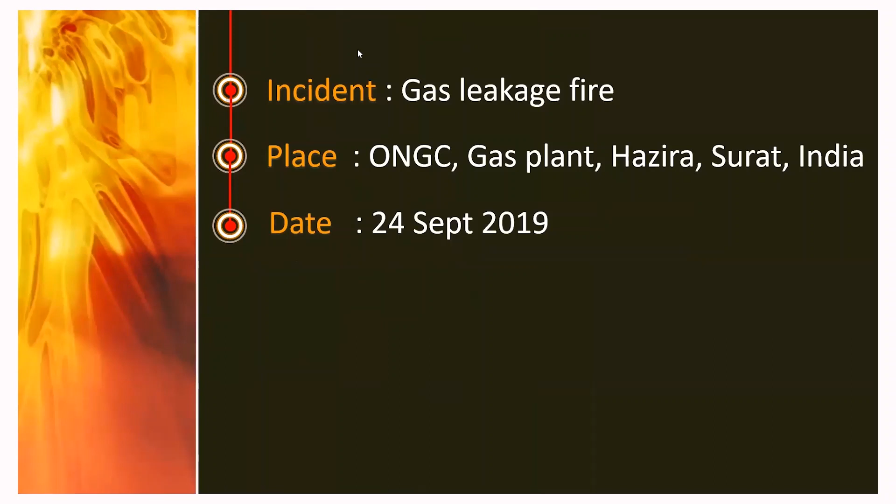It happened on 24th of September 2019 at Hazira. Basically, it was a gas leak and fire at the Hazira facility, Surat. Actually, I worked nearby that industry for 1 year, so I am very much familiar with the place. It was on 24th of September at 3 a.m. at night.

So there were many such news reports around about the incident. Let us talk about PEAR loss. Basically, whenever we are talking about loss, we always use this PEAR term: people, environment, asset, and reputation. Basically, in the incident it was not arranged like this, but we tried to map it.

People loss: what they mentioned, there is no injury or any fatality. That is good. Environment loss: they mentioned a few damages to trees, but really there was a huge release and huge dense smoke. That part was not mentioned. So here only damage to a few trees is mentioned.

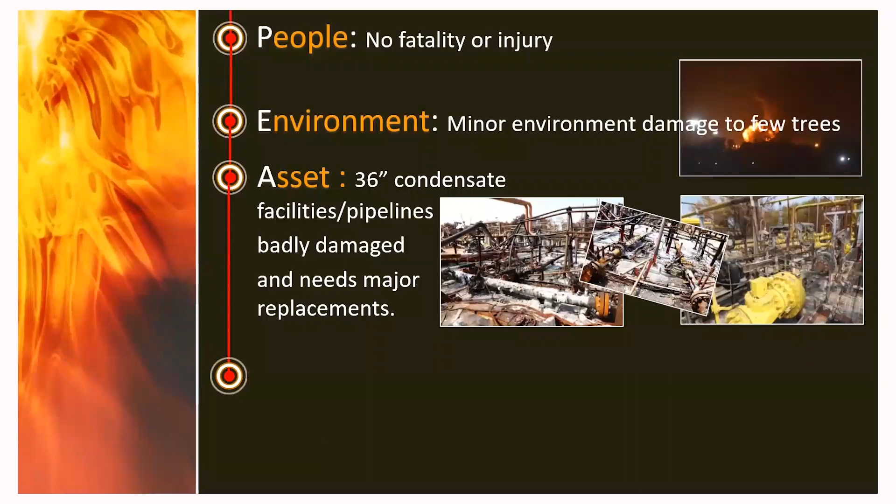Asset damage, you can see from the photograph itself, huge asset damage, production loss, and so on. But as per the report, they mentioned only that a 36-inch line, one of the condensate facility lines, was badly damaged and needs replacement.

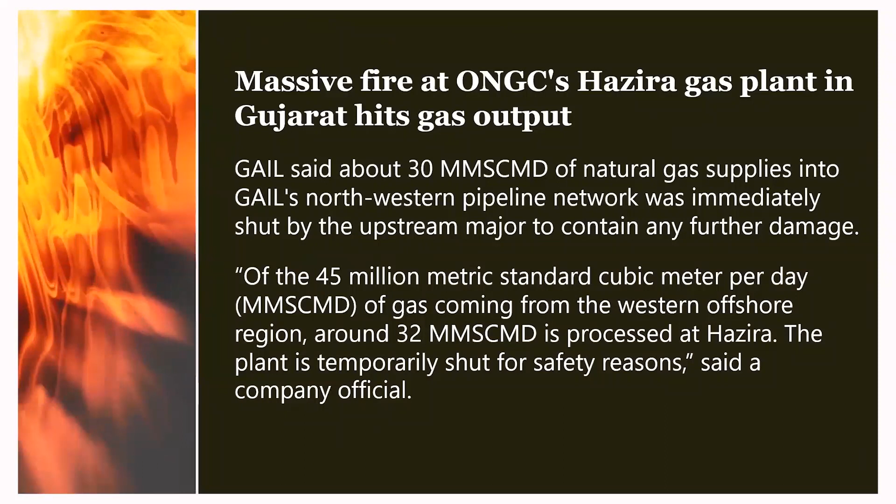Reputation-wise, it became a news headline for all such news channels and newspapers here and there. One of the news headlines talked about 30 million metric standard cubic meter gas supply to the northwestern region being interrupted because they had to shut down the plant.

So this is all about the loss. Now let us speak something about the plant and process. It is basically not of much interest because we are talking about the incident, but we really need some information. So let us talk about the plant and process.

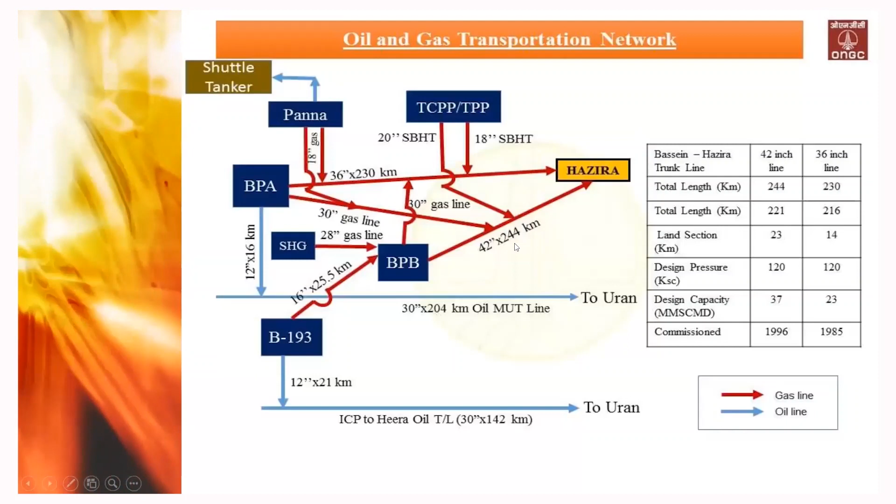Basically, they were receiving gas along with condensate, and there is a huge network of such gas lines. One of the most important aspects: there are two lines, a 36-inch line which is around 230 km long, and a 42-inch line which is around 244 km, coming to the Hazira plant for processing.

There it is processed in the gas terminal. The gas terminal is nothing but a kind of separation of gas from condensate. The 36-inch and 42-inch lines were well designed for mixed flow of gas and liquid. In the gas terminal, it is separated through a slug catcher, and then gas is routed through various cleaning units for further distribution. Similarly, condensate is processed and routed for local customers and other finished products.

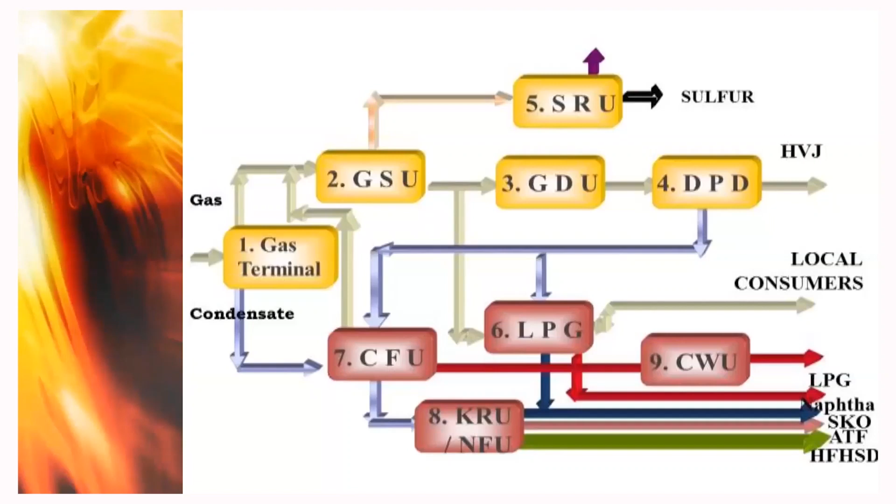Our major focus will not be on this GSU, GDU and all, because it is not of much interest to us, but yes, something happened to this gas terminal. So let us go through this block diagram.

I tried to prepare this block diagram based on the description available in the investigation report. So here you can easily understand what is inside and outside.

There are two lines, 36-inch and 42-inch, coming to this gas terminal for separation. This is one of the isolation points, with two isolation valves for each line, and another isolation called the valve station. The 36-inch line valve station was 1.7 km away from the facility, so it is offsite, and inside there is one valve. Why are we talking about this valve?

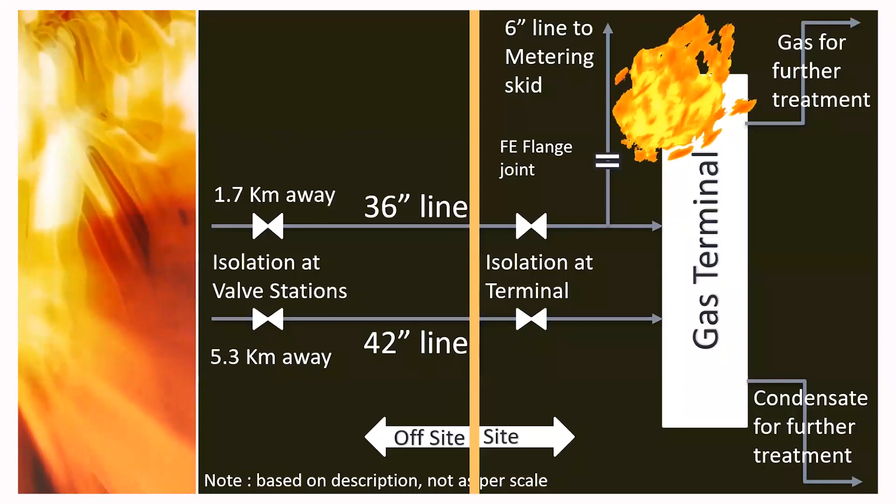Because it is one of the points of interest in the discussion. After this valve, there was a connection for a metering skid, a 6-inch line, and particularly this flange was leaking - I mean it started leaking and then fire followed.

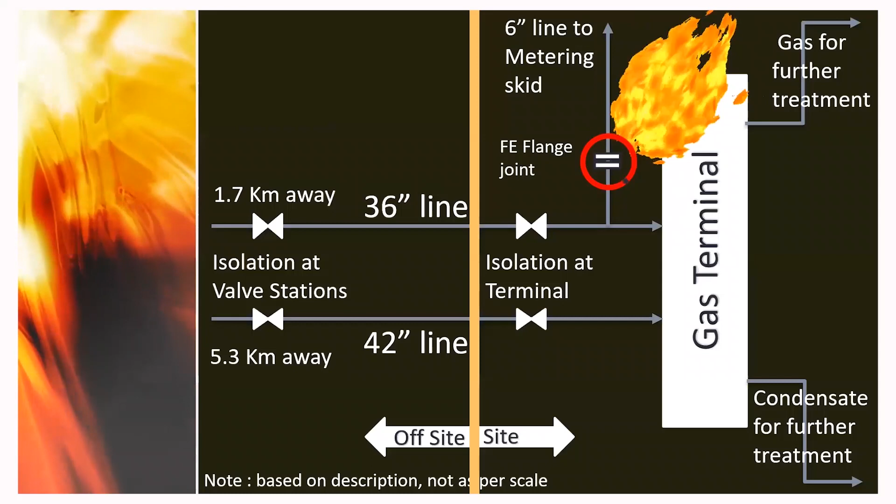So this is the location where the actual leak and fire happened. Again, it is based on my interpretation from the description, but more or less it is matching. So this is all about the plant and processes.

Let us go through the incident timeline. What happened, and at which time? At 2:15, one of the security guards observed noise as well as a vapor cloud from the location, and he informed the main gate control room, LPG control, and various other control rooms, since they have a defined way of communication, so they communicated accordingly.

Almost after 3 minutes, the same thing was reported by one more person, and it could also be identified through CCTV. After around 2 more minutes, they started more communication. So by this time, everyone around was informed.

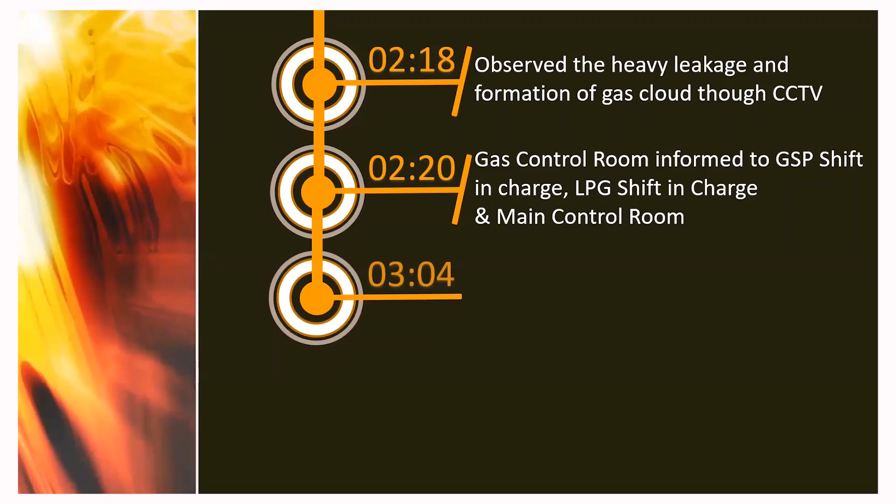Around 3:04, one of the pressure control valves - this pressure control valve, again, I could not locate because it is not the 36-inch line valve; there is something controlling the downstream pressure - that valve was closed. But this valve is not an isolation valve for the particular gas line, which we will talk about later.

At almost 3:08 hours, fire took place, as per the CCTV footage timeline.

So they started closing, messaging and closing. Then at 3:30, closure of sectionalized valve. In between, there was a vapor cloud, so they could not stop the immediate control valves, the 36-inch and 42-inch valve. That is why they started controlling from other end, closing these 36-inch and 42-inch line at that valve station, basically 1.7 kilometer away and 5.3 kilometer away.

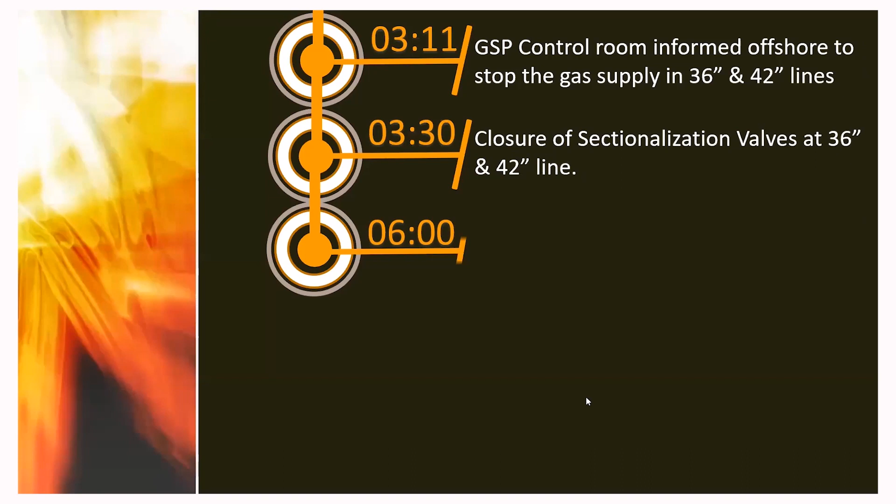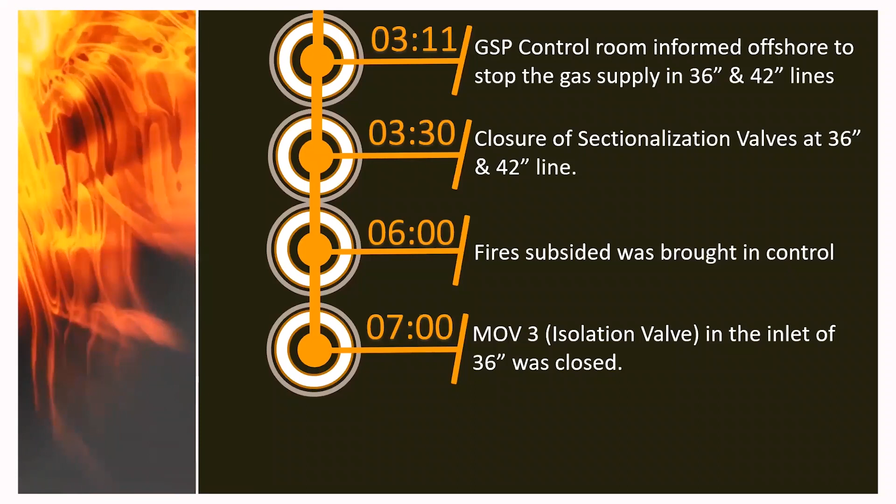At 6 o'clock, fire was controlled, and at 7 o'clock this particular MOV3, that is isolation valve, main isolation valve inside the plant, was closed, because after fire only they could assess the location and close the valve. It was motorized operated, but remote access was not there from control room. It was not operable, only operable at site. And at 7:30 they declared all clear.

So this is the most interesting thing which we can learn from this point: observation and finding by committee. The committee categorized the observations with respect to various titles like facilities, safety, maintenance, firefighting system, electrical maintenance, quality assurance, and all. Let us go one by one quickly, since we have limited time we may not go into detail, but I have kept some important points we can go through.

So for facility, based on that observation, they observed various things like mismatch of drawing in P&ID versus available in field. Some of the PT and delta P transmitters were available in P&ID, but they could not locate them in DCS. So actually it was not there, or how and where they disappeared, it is again an issue. Mismatch of time stamping - they wanted to check various DCS data for the same event, but there was mismatch of the same event from one panel to other panel. So again it is a mismatch.

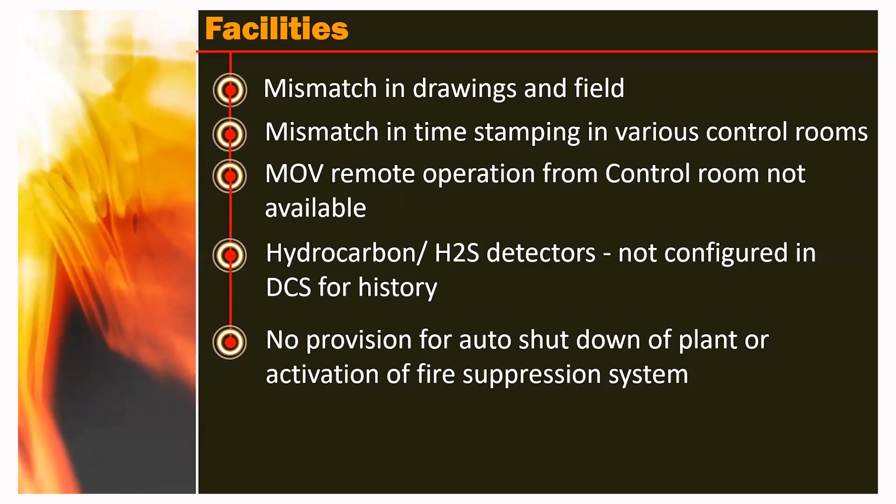Let us quickly go through the next point with respect to safety. From safety, they have targeted a few audits like self-safety audits, internal audits, external audits, fire drills, incident reporting system, and emergency response system.

For self-safety audit, what they observed is the audit is done, but they were using a checklist, and the checklist items were not covered. Many of the observations were not covered even. So there is no meaning of preparing a checklist here. And with respect to that, there was no specific checklist for the plant - it was some very generic safety check.

With respect to internal audit, they could identify there were two audits in 2018 and 19, but there was no checklist. So again, how they will be doing audit, these are again questions for them.

External safety audit - the observation is there were 308 recommendations. It was done in 2018 and there were 308 observations. So from external audit itself we can understand what huge gap there was. Out of these 308, 296 observations and recommendations were completed. But sometimes how we are completing, just completed without any further action sometimes. And the balance, almost 12 observations, were still open, and they extended the date up to April 2021. So these are some of the observations.

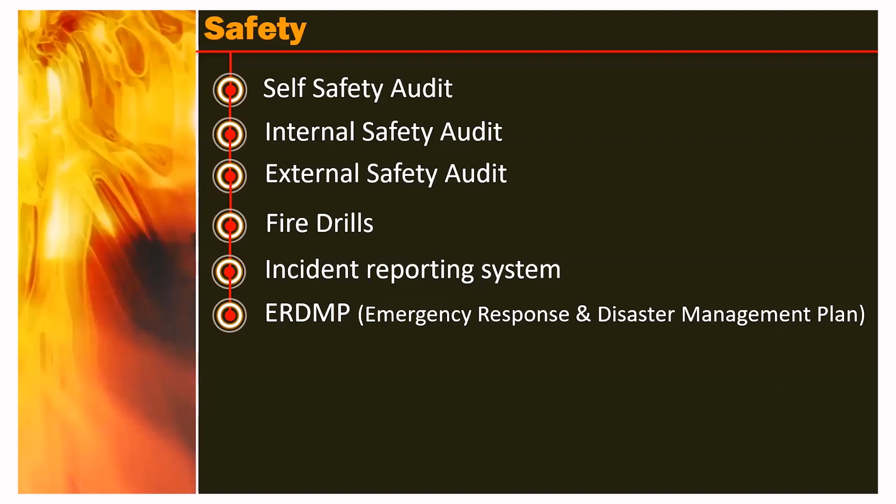And that is what we can observe here - they were doing isolation, the leak started at 2:15 and they were doing isolation at 3:30. So a huge gap. As we all know, the very first step shall be to isolate the system, but they could not do it since their emergency response plan does not talk about it.

Another issue, with respect to firefighting system, what they observed was capacity was not sufficient. But again, the basis is not given for why it is sufficient or what.

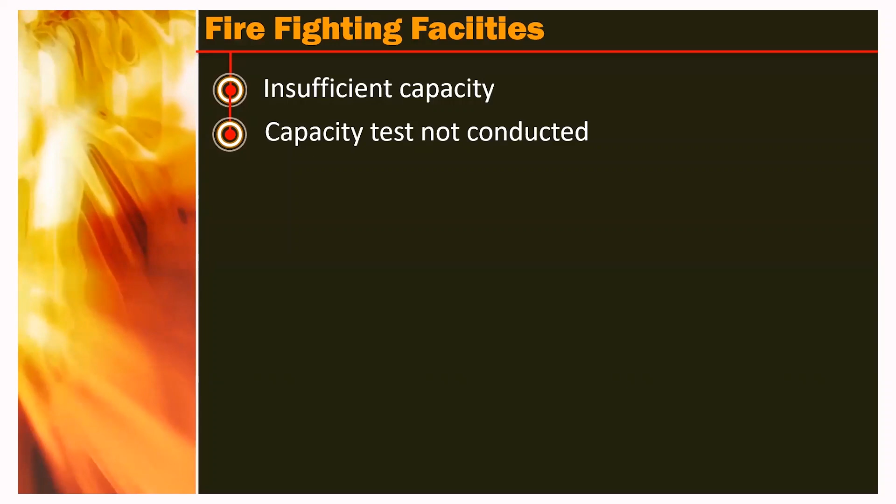Capacity test not conducted as per OISD - basically as per legal, Oil Industry Safety Directorate, there is a legal kind of requirement - but they do not do capacity tests, and even fuel consumption is not logged.

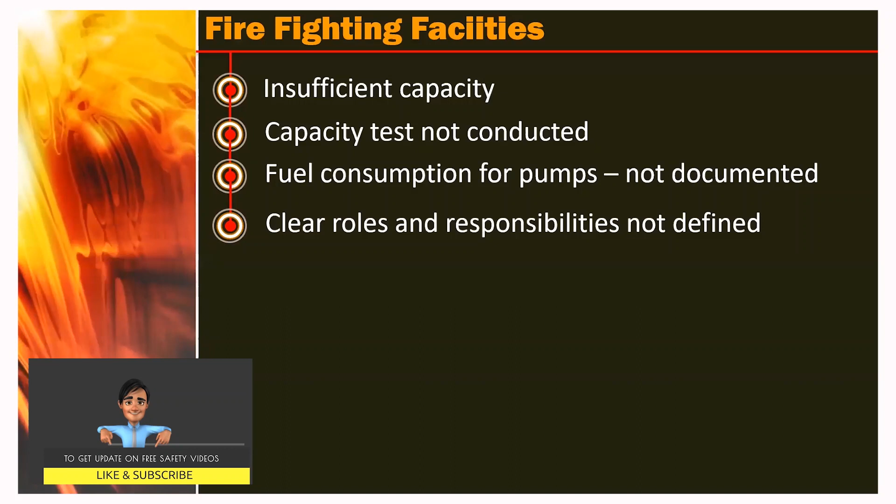Clear roles and responsibilities not defined. How can we understand - the maintenance and operation of pump, tanks, pipeline, hydrant are monitored and carried out by various departments like utilities, sometimes some parties by maintenance, sometimes other agencies or contractors. And how they are performing their roles and responsibilities is not monitored, functioning is also not monitored.

The actual firefighting operation was by CISF, which is an outside agency, and ownership of the assets was with ONGC. Even with CISF, basically security staff, how they are doing firefighting and all - again, it is a question.

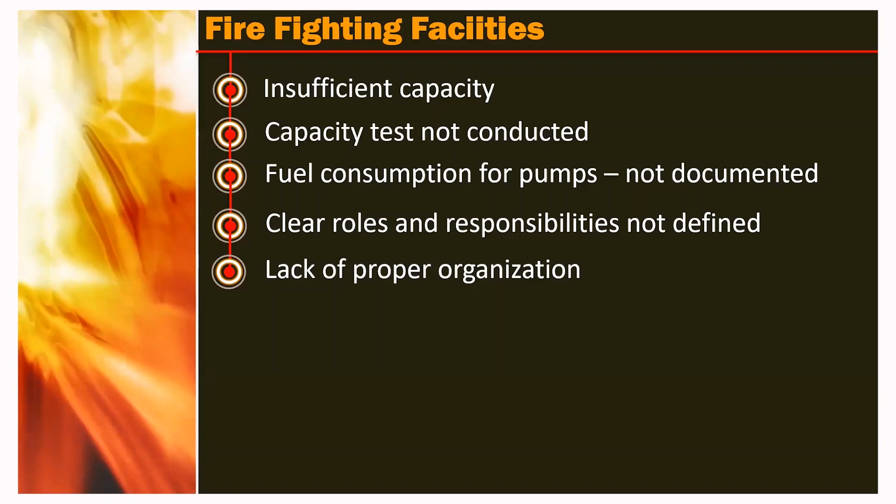They were supposed to carry out such activity under guidance of the fire chief, but they were reporting to the shift in charge instead of the fire chief. So there is a mismanagement - there is no particular fire crew or something.

With respect to maintenance, we can speak about management of change not being followed. They mentioned one example for this particular FT we were talking about - that FT was calibrated, and its calibration was changed.

It was 16,000 water column. It was changed from 16,000 to 2,500 without any management of change. After 6 months, again they changed the setting from 2,500 to 16,000. How? Why? Everything is not mentioned. So management of change was totally not followed, as shown by this example.

Critical job management not adequate - one example they mentioned for the same FT, on 18th of September, just a few days before the incident.

One notification for maintenance was generated, and there was a requirement of a gasket, but that gasket was not available, so they procured it from the local market without any specification or quality control. They even kept this particular meter in service only by operating a pressure test - just kept in service without any further hydro test, and there was no SOP about calibration and putting in line for such critical equipment.

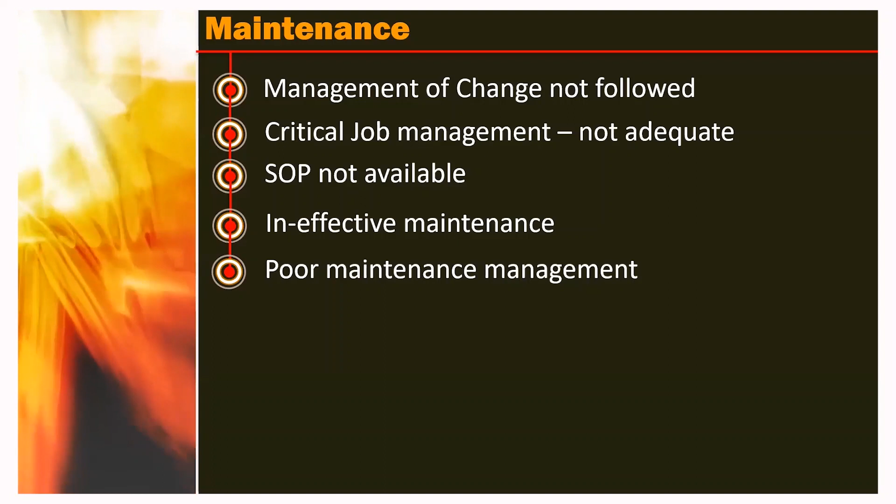What they mentioned: 7,935 notifications were raised in a year, and 1,060 notifications were pending. Out of this 1,060, 252 notifications were raised just before 3 months. So we can see nobody is asking about the notification management, maintenance management, why it is pending, what they did. Even they are closing notifications sometimes without any detail of what they did or how they did - no need to enter, just they are clicking, or maybe some system, they are closing the issue.

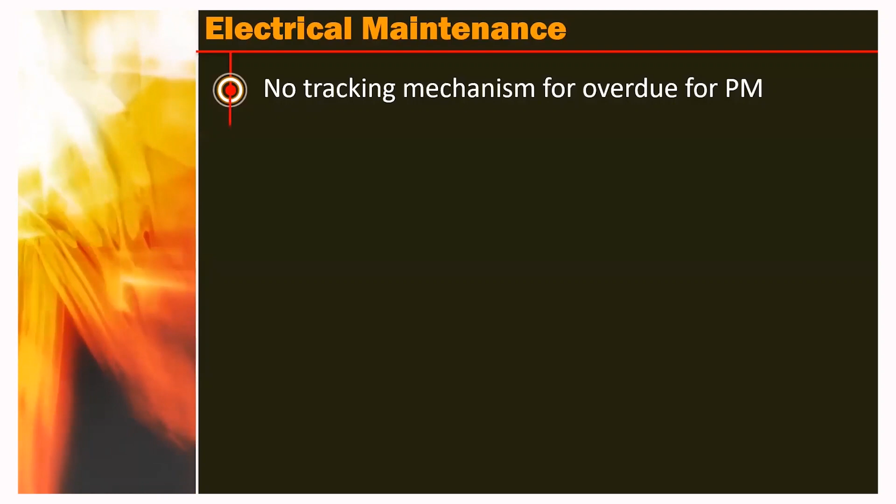Another point, with respect to electrical, there is no tracking mechanism of overdue, similarly for maintenance, no mechanism to check overdue, no mechanism to record reason for overdue, and no unique identification.

This is one of the interesting items because it is relevant to our incident. They have a number of flame-proof electrical equipment like lighting, junctions and all, and they do not give a unique number to that. So this is one of the gaps - there is a chance of every time missing some item or repeating some item. For preventive maintenance, it is a gap because if we do not have a unique identification number, then inadequate electrical audits result. After this incident, there were audits conducted.

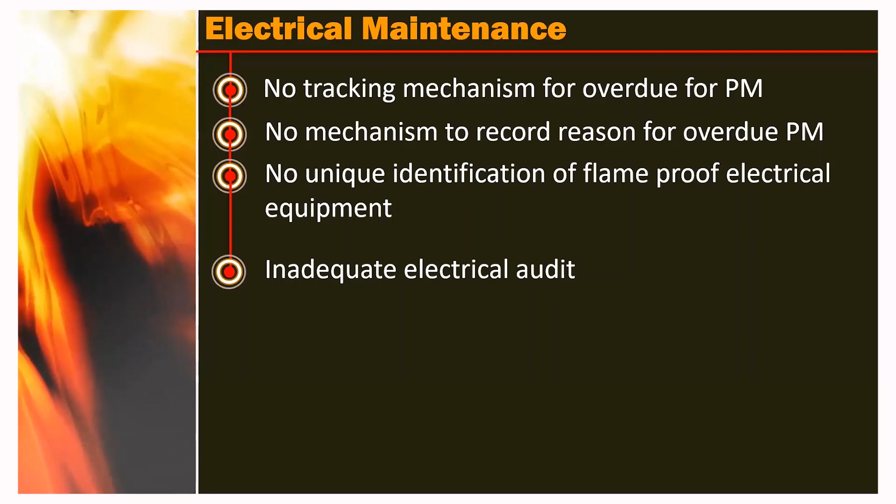Now again we can say they do not learn. After the incident, they had an electrical audit to check the electrical connections and other equipment, and they generated a report which was just a generic one-page report, and they did not mention details about anything. In particular, one of the lamps was found damaged, which was the cause of the ignition source, but they did not mention about this particular lamp.

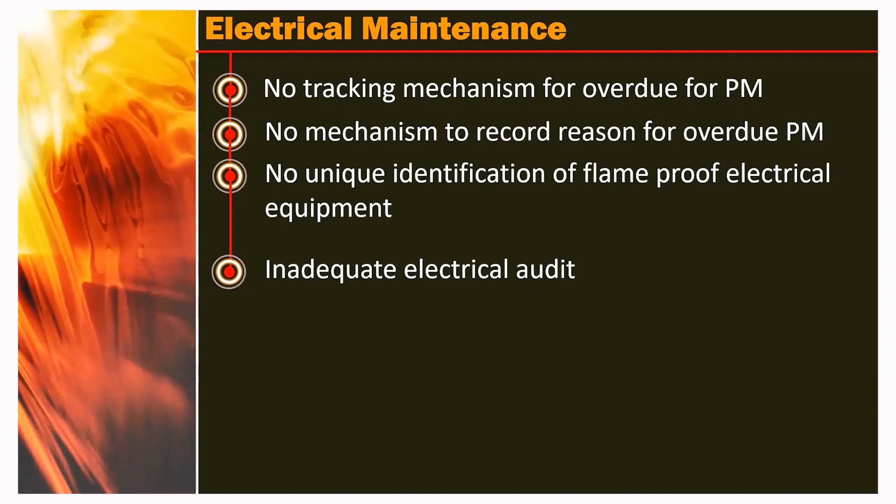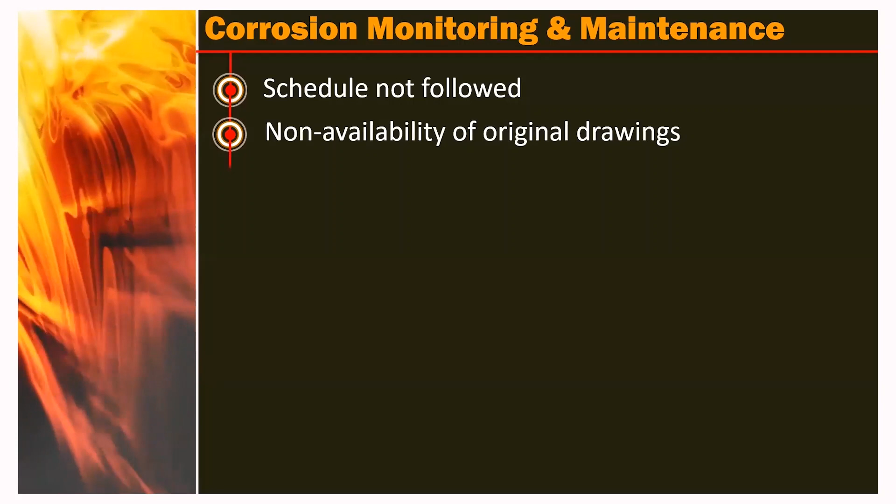With respect to corrosion monitoring and maintenance, the schedule was not followed, and there was non-availability of original drawings. There were many such issues, including no procedure for selection of thickness survey spots. So again, there is a case that a particular line may not be checked because there is no procedure on how to select the spot, and there are chances that one spot is being checked every time while some spots are not checked at all.

No action or insufficient action on monitoring. Basically, what they have mentioned is that in 2000 they had a schedule to do monitoring every 4 years, but they did not follow it. They did one survey in 2011 and the next survey in 2017. So there is a gap. In one of the surveys, they identified various thickness loss, but they did not do anything about it.

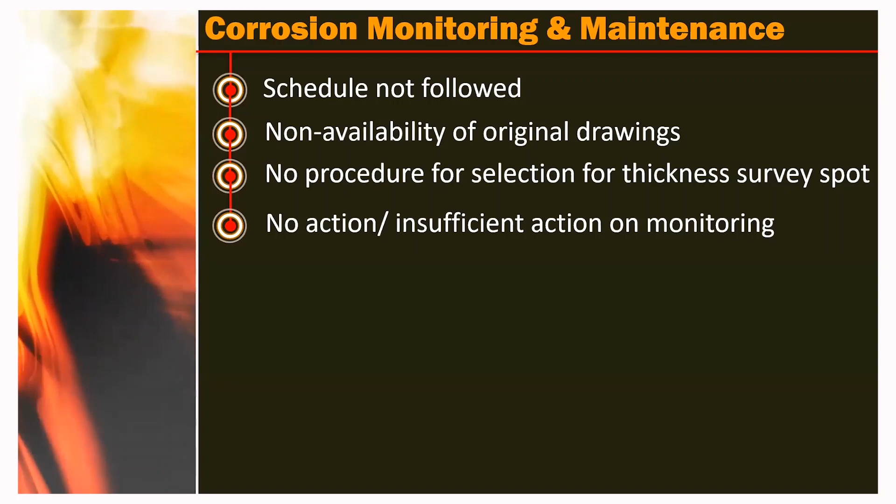Or even at one of the thickness survey reduction points, what they did was apply coating - not even coating, just paint. Whether painting of the pipe is sufficient as a corrective action for thickness reduction is again a question.

Some general observations - they could identify a lack of proper design of the control room. The newly designed control room was supposed to be a blast resistant control room, but the doors were not blast proof. So this shows improper design.

Inadequate training and competency - we can easily identify that CISF security personnel are performing the job of firefighters, showing inadequate training. They have clearly mentioned that training with respect to safety, operation, control room handling, logbook writing, and what to do in case of emergency was not at all managed. People were not trained. What they mentioned is they have a 4-day training program for new recruits, but after that, no training. So whether it is sufficient, we can easily understand.

And even the qualification of staff is not mentioned in HR as well as operation policy. One more thing observed with respect to training is that the last training most of the staff attended was in 2018. After that, no training - so 3 years without training.

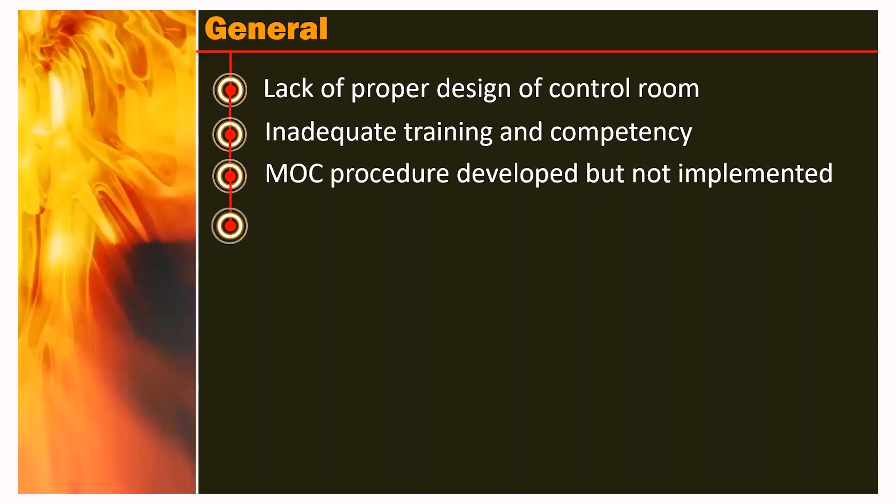MOC procedure was developed in August 2016 - they developed the procedure, but it was not rolled out. So without rolling it out, how will people come to know there is a procedure and that they need to follow it?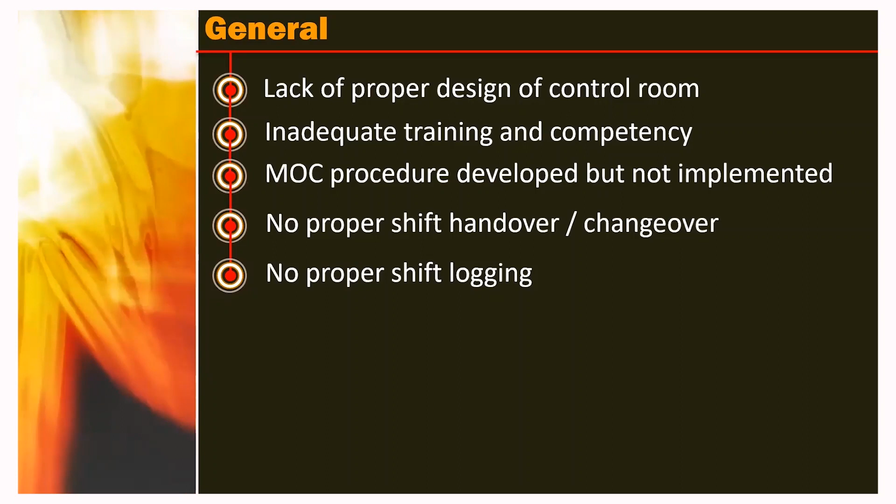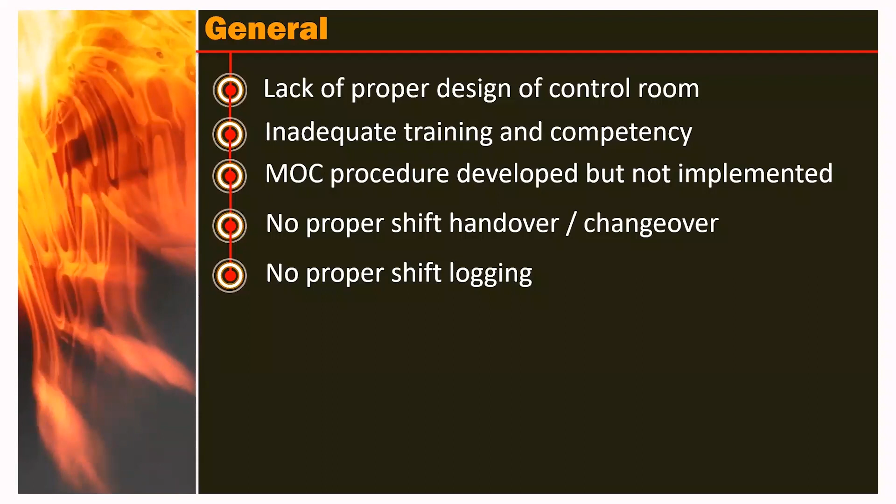There was no proper shift handover changeover. People are writing logs in just a makeshift arrangement register. They were not even entering activities, any events, or any alarms, and the handover takeover procedure is also not in place. These were all the observations. Due to lack of time, we are just running through the observations.

Now let us move to the immediate cause and root cause. The immediate cause was a leak - that's what they observed. The leak was from this particular flange, because just a few days before there was maintenance on it, and without any hydro test it was put back into service. Majority of the bolts were found broken, meaning damaged, but whether the specific leakage from the pipeline was due to corrosion or flange leak, they could not ascertain.

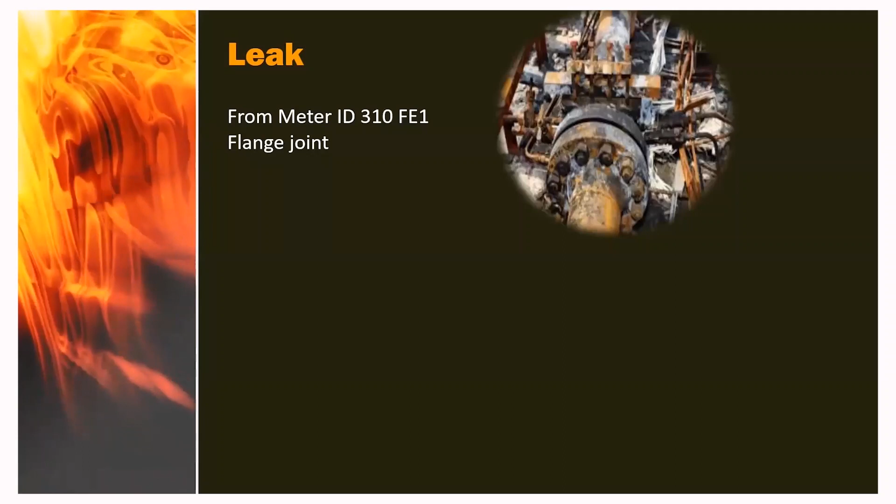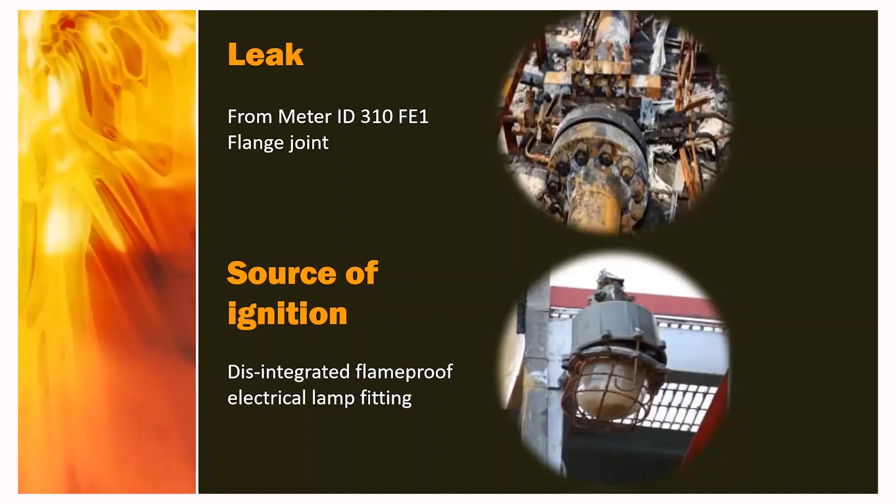Another aspect is the source of ignition, one of the disintegrated flame-proof electrical lamps. What they observed may not be part of the preventive maintenance program, because of lack of unit identification number.

Root causes, yes, what they mentioned as root cause is again a point of discussion, and Mr. Ujjwal Ritik will focus more on the report.

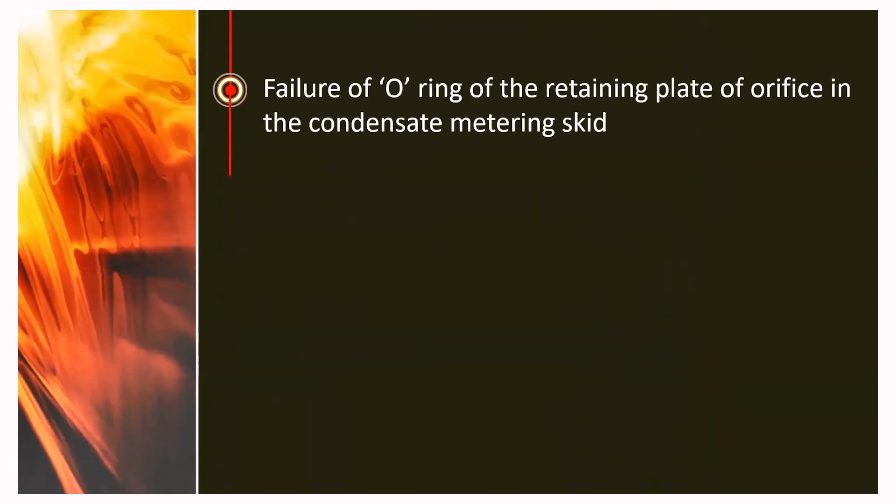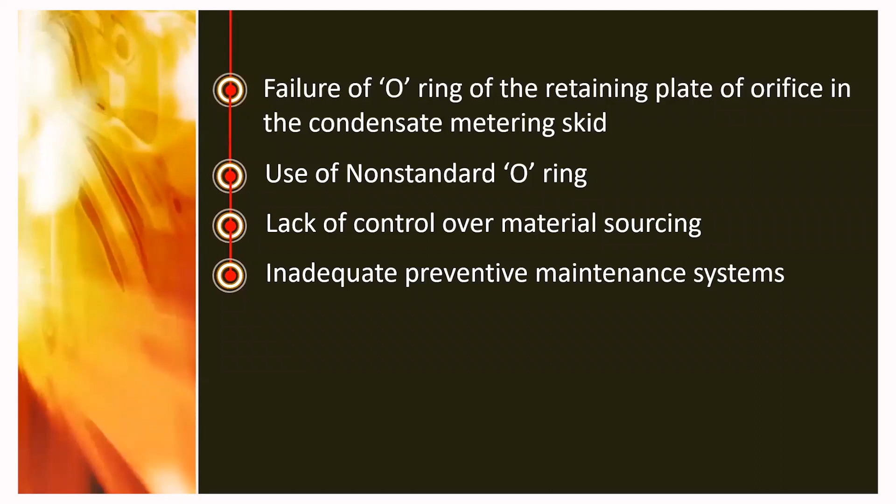Failure of o-ring, and failure of the condensate metering skid, use of non-standard o-ring, lack of control over material sourcing, because they are just doing local purchasing with no control over that. Inadequate preventive maintenance system, which we already discussed in detail.

Non-isolation and stoppage is one of the issues. They closed the valve even at the valve station at 3:30, and even after extinguishing the fire, they could not stop the leak at the local isolation point.

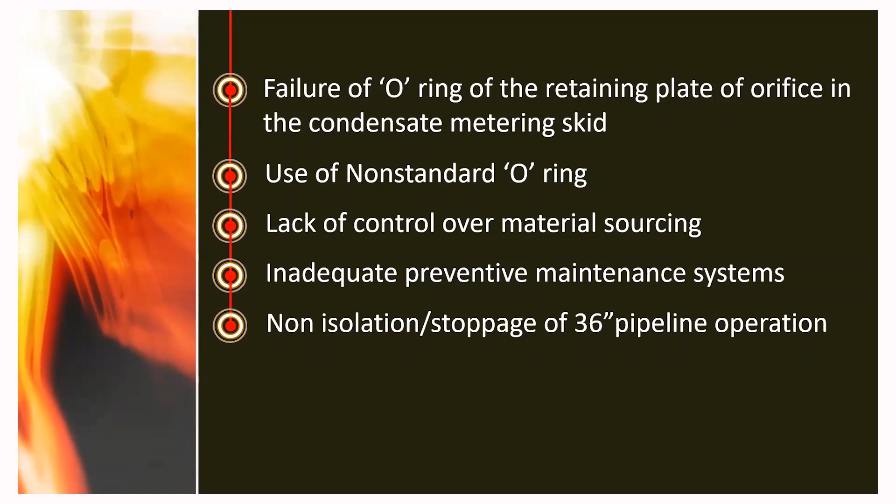So, committee recommendations — we will not talk much in detail here, because whatever observations they could identify, they were giving line-to-line recommendations. Like for example, they mentioned that all P&ID should be provided to be checked.

First of all, we much appreciate the efforts made by ONGC, and particularly the Petroleum and Natural Gas Regulatory Board, that they have instituted such a process of independent inquiry — relatively independent, I should say. And the report has been put in the public domain.

But one thing that strikes me is that the intention of the report is not very clear. They talk about one intention being that this incident should not happen again, but they are not specific about where it should not happen — in that same plant, similar plants, ONGC, or in oil and gas and hydrocarbon facilities across India, since they have hundreds of such facilities under the Petroleum Regulatory Board. If that intention is not immediately clear, then to whom this report is meant is not pointed out, and therefore who will learn from this is also questionable.

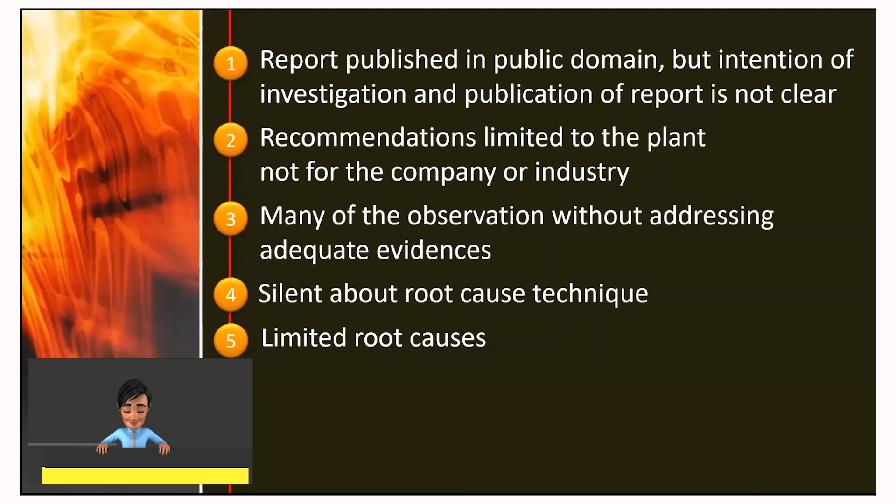Possibly they should have gone beyond as to why there was so much asset integrity failure in this whole facility. And a bigger question to ask is whether there is a similar situation all across ONGC facilities, all across petroleum and natural gas facilities across the country, that they are in violation of so many OISD requirements. And who was auditing, who was monitoring, why it was like this? They have to go beyond.

As we say, even a simple 5 Why technique could have given them better value for the whole effort. But what we find here is that in the name of technique, the 3 investigators just did brainstorming. Brainstorming alone cannot lead you to a good root cause analysis. And if the root cause analysis is not good, good solutions also cannot come, and lasting solutions may not be possible.

They are completely silent about previous incidents that took place in that region, in that area, in that facility, across the facilities. Completely silent about asset loss, production loss, business interruption loss. Okay, I understand maybe this is a facility of strategic importance and they don't want to talk about loss in terms of rupees or dollars or things like that.

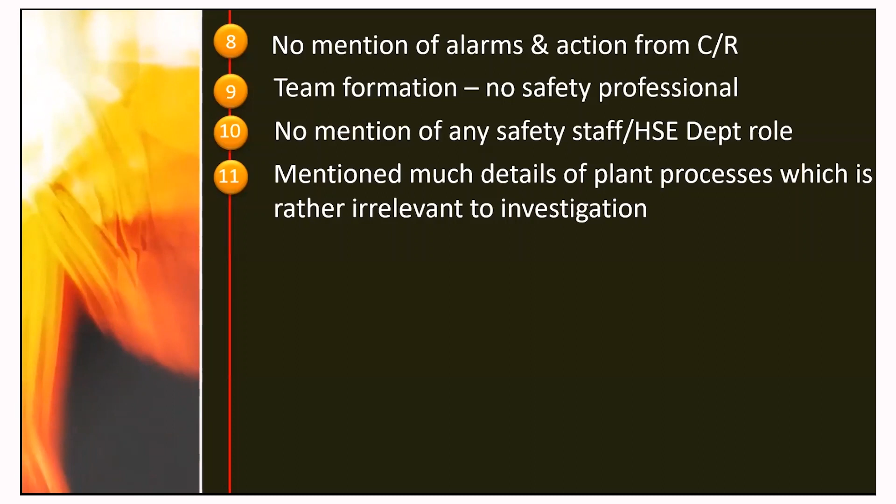No investigation about the noise heard by security. The report starts, and the first paragraph says that a security person heard a noise. But when you get into the detail, into observations and root causes, you don't find anything about that noise, which was heard at the beginning, at around 2:15 in the morning.

Now, they got abundantly lucky that there was possibly no explosion. Just imagine a hydrocarbon leak, high pressure liquid hydrocarbon coming out from the condensate line, and we have seen the video footage that there is so much leak around. They are abundantly lucky that there was no explosion.

But again, that's questionable. We have shown you initially a newspaper clip, I think from Hindustan Times or some other news agency. Three explosions were heard by the public. They are not talking about within the plant, they are talking about the public, and the public heard three loud explosion noises.

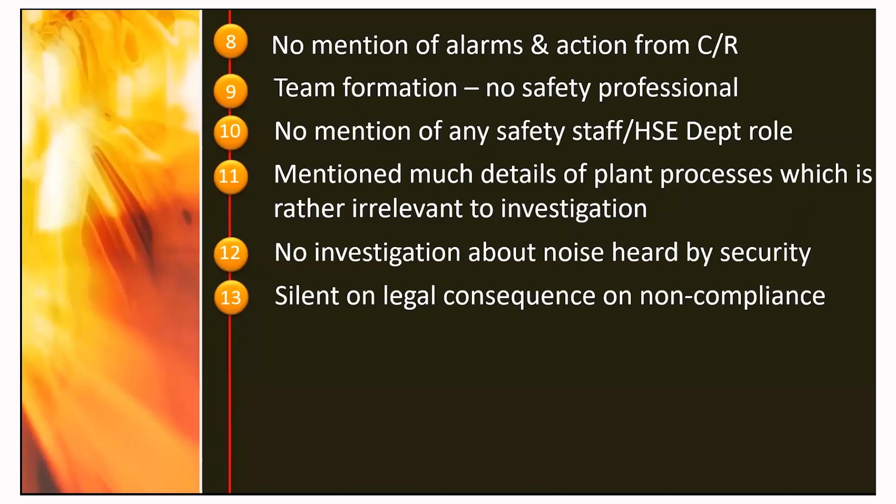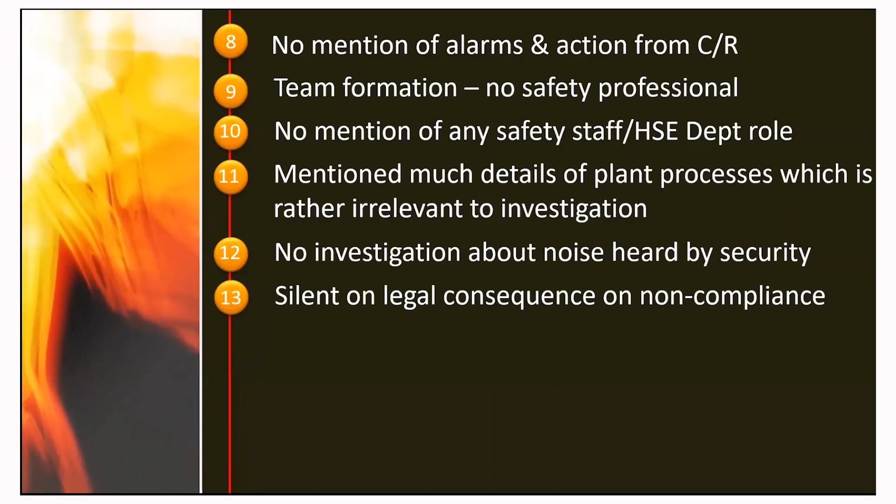Silent on legal consequences on non-compliances, etc. In fact, what OISD norms, what petroleum regulation norms were violated, nothing, the whole thing is completely silent about the legality or the techno-legal aspect of the situation.

Attempted to search for the leak in the vapor cloud. They have talked about some people attempting to search for the leak, but I don't know if it was the right decision on their part. Nothing is discussed on these lines.

They used many acronyms, and full forms are not mentioned anywhere in the report. So unless you are fully familiar with the plant, the system, the organization, and various terms and abbreviations they are using, it becomes very difficult for an outside reader to follow the report and make full sense out of it.

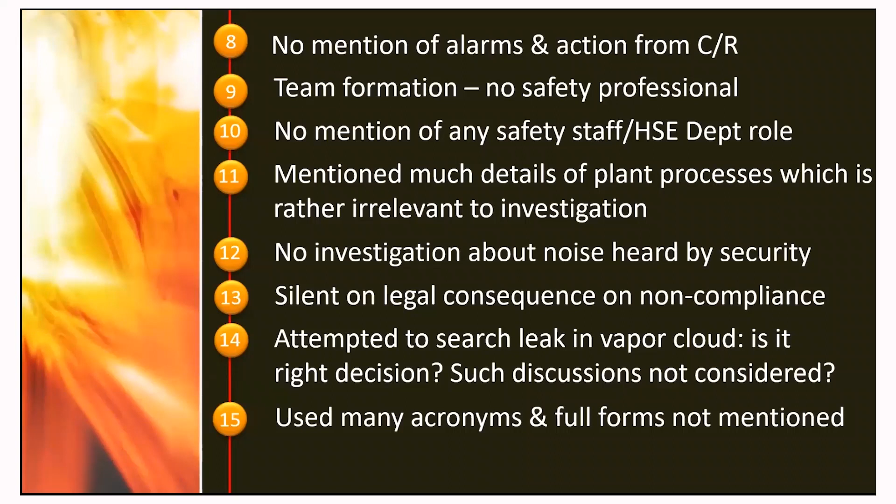Now, my small submission is that, yes, I fully appreciate the work done by the committee. They have done their work to the extent that was possible, but as I told, their efforts, whatever they have put in, have been devalued by the process they followed.

The whole process, I mean that of getting into the incident, investigating it, and making it public, putting it in the public domain by PNGRB, is very much appreciated. But again, as I told, there is much to be done.

In fact, this regulatory board has a lot of work to do. I cannot get into further detail, although there is much to be said.

Questions are raised. Only 7 incidents since 2016 reported. Now, anyone who has any idea about the hydrocarbon industry in India will look at it with much doubt. Only 7 incidents since July 2016 until March 2021, or January 2021 -- it's kind of difficult to accept.

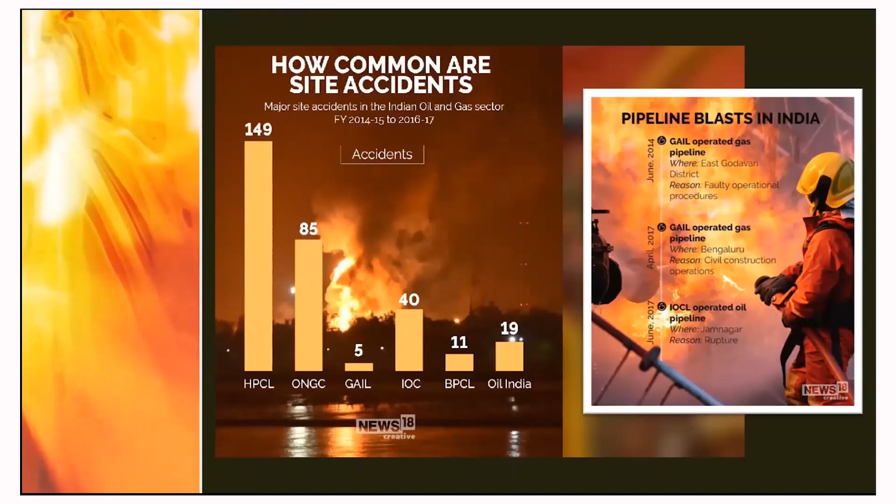Incidents are common, pipeline incidents are common. I have just collected some media reports. They may or may not be correct, but at least it gives a flavor that we are much beyond what is actually shown on their website, on the PNGRB website.

So, in conclusion, some of the lessons were not learned. Possibly, as you look at where you are, many of the lessons were not learned. In spite of this effort, accidents keep occurring, lessons are not learned, and there is a need for improvement in the investigation process and the competency of investigators.

Again, I don't want to say for a moment that these three people who conducted the investigation were in any way less competent or insufficient, but the report goes against, not so much in favor. So, there were lost opportunities for learning. There was an incident from which we could have, within the industry, within that country, and outside the country, students like us would have learned, but we could not.